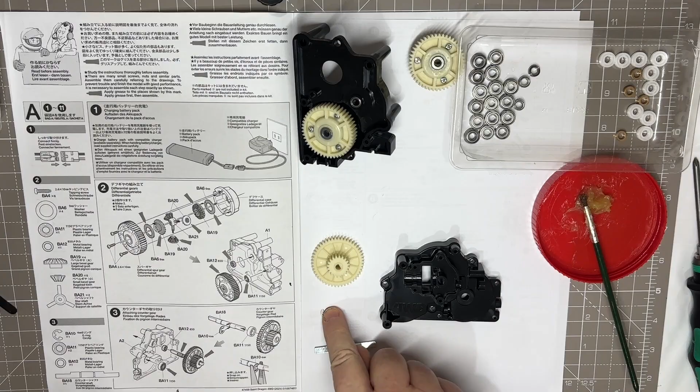So we move on to step 3 now, and for this step we need some more components. We're going to need one of these BA10 E-clips. You can get this the right way around by placing it on the drawing again.

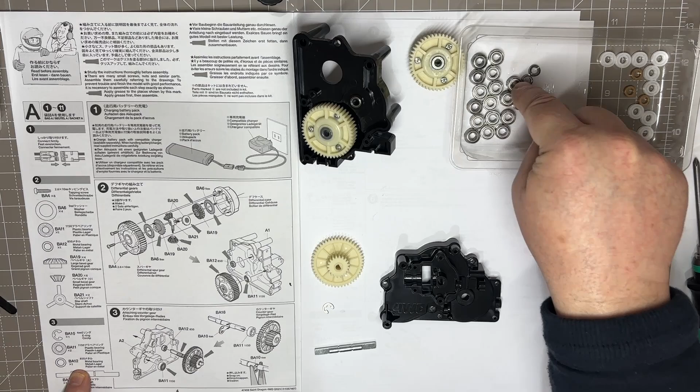We need our bearings. We're going to replace them with proper bearings like before, so we need 2 of the 1150 size bearings and 1 of the 850 size bearing, ready in the tray. We also need this counter shaft. You can confirm it's the right one by looking at where the E-clip goes in and offering it up to the drawing.

We're also going to need A2, the other half of the gearbox that we made in step 2. Again, make sure you take off the flashing using a model knife, etc. Okay, now we need to put this together.

First step is to put one of these E-clips on. These are the dreaded E-clips everyone loves, but as this is a larger type, what we do is place it ready, put it down on your bench, and keeping it square with even pressure, just push and it goes over. This is an easy one, because it's bigger it's easier. So there you have your E-clip on.

Then we take one of our 1150 bearings. We can put a little bit of grease on here if we wish, that's not a problem, but normally that's for the plastic bushings. But hey, we've got metal bearings now, so place our metal bearing over the shaft. So we've got our bearing on there.

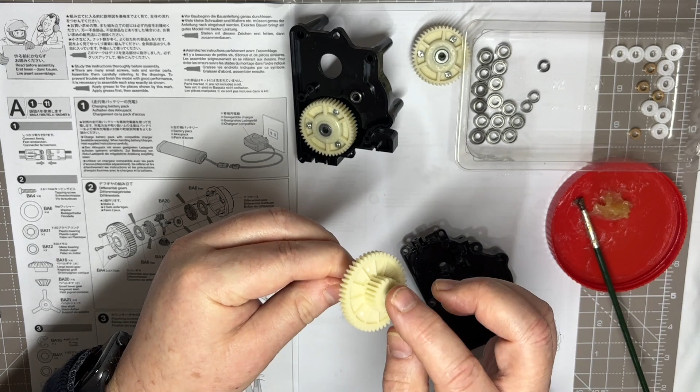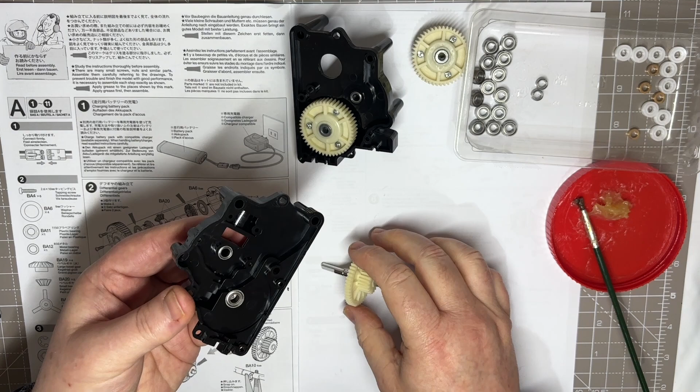Then to complete this step we take our gearbox half, our A2, like before, and place one of the 850 bearings in here and one of our 1150 bearings in here. Again, you can't get these wrong because they're the only sizes. Then we place this through here.

It does say to grease this shaft here, so I am going to put some grease on it, but I don't have to go too mad. I'll tell you why - because we're using bearings as opposed to plastic bushings, the wear is going to be very minimal. So there you go, put some on anyway. Right, so that goes through there, and that goes like that.

But we also need to make sure we grease this gear as well. I'm not going to bore you with putting grease on, you've seen me do that before. So I'm just going to put some grease on this and then put it back in again. Okay, technically that'll be it. There you go, it's there like that, and we're going to be greasing these as much as we need to. So that is step 3 completed.

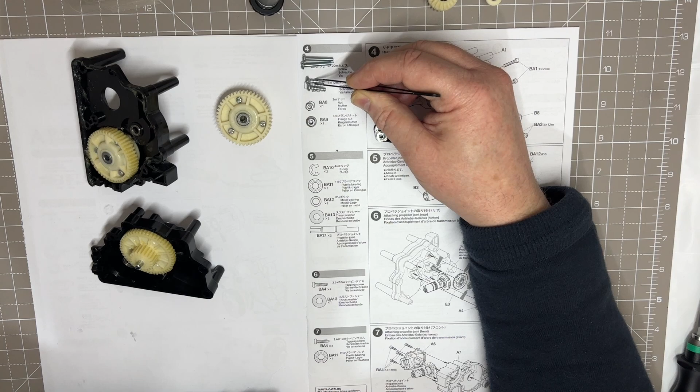So we move on to step 4 now, and for this step we need some more components. From bag A we need these BA1 machine screws, 3mm by 20mm long, so we need 2 of those. We also need our BA3s, self-tapping, 3mm by 12mm, so we need 2 of those. We need a BA8, a 3mm nut, and then a BA9, a flanged nut. You can slightly see the difference, but offering them up on the drawing, you can see.

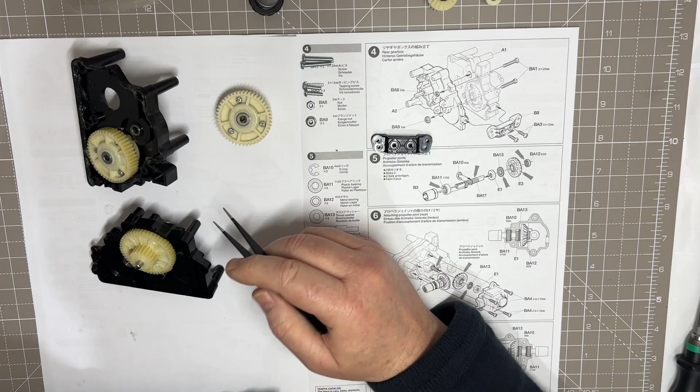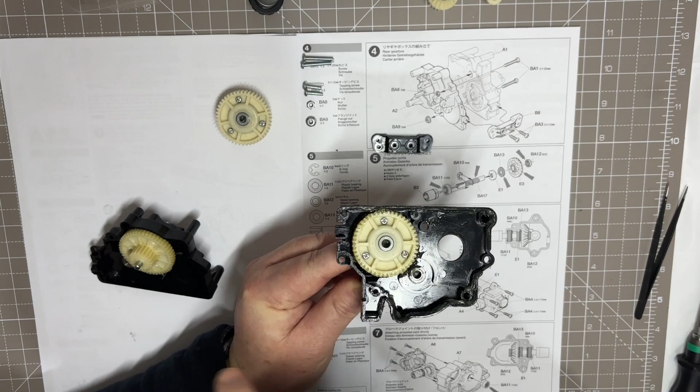From parts tree B we need this component, a B8. We're also going to need our 2 halves of the gearboxes made in steps 2 and 3. Now, just to quickly explain why you see grease all around the edge of this gearbox half - this is so that when I put the 2 halves together, I seal the gearbox. It's a little trick I picked up from some other guys on YouTube. So it seals the gearbox to stop anything getting inside.

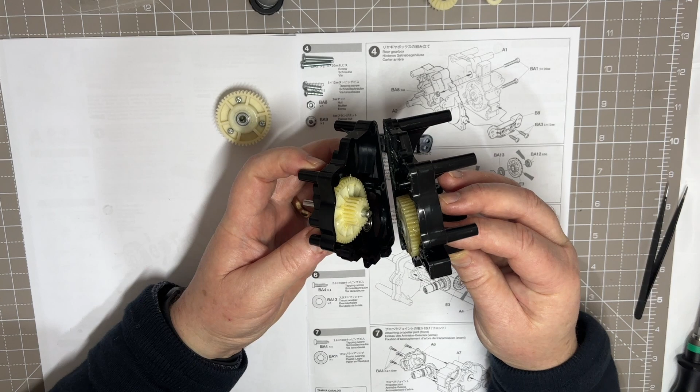So let's put these together. Let's take our two halves - it doesn't matter which way round, I suppose. So this is this half, and that is this half here. And we're going to put these two together, and that should match there - we are, like that. Okay, and they're together.

Then what we need to do is use these machine screws with one of these nuts. So that goes in there, and while we hold that with our little finger, take one of the machine screws and pop that through. Nice and easy.

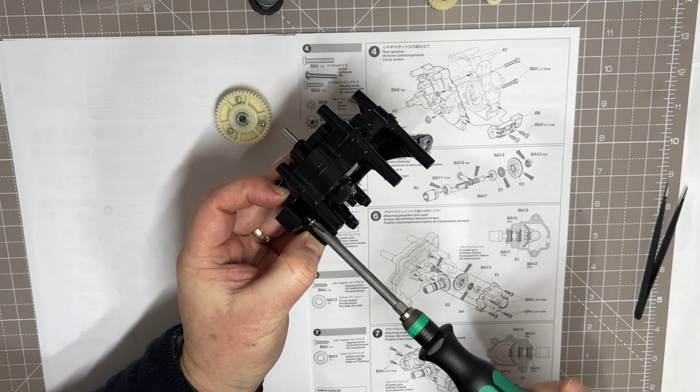And the flanged one - we need to make sure we get the right one as well. The flanged one goes down the bottom end, I think, somewhere. I believe it's got to be down, down, down, down on the other side of this one here. You can kind of see this little nut down there, so it goes down there, and then this one goes all the way down and through. Then if I catch a few threads on there - here we are, so there we are, that's through.

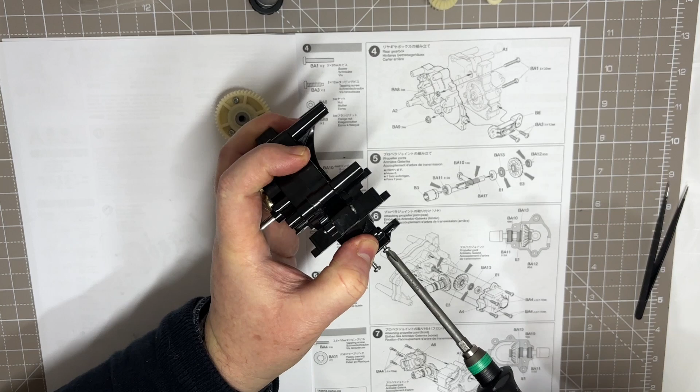Then on the front here, we need to take this piece and, getting the orientation correctly, pop that in across the front there, and secure that with some of these self-tapping screws - the 3mm by 12mm self-tapping screws. You need to make sure that's the right orientation, then secure those like that. And you have a gearbox. Wonderful. And that is step 4 completed.